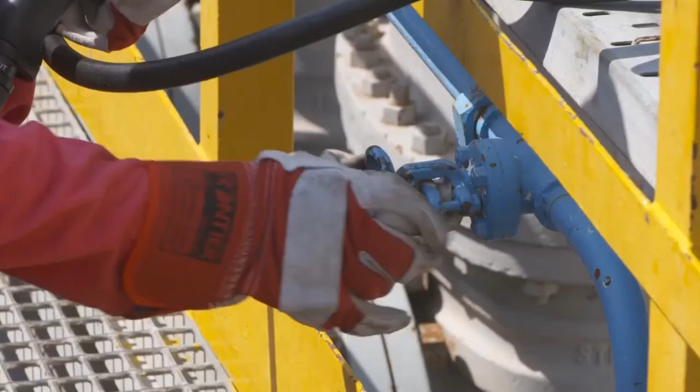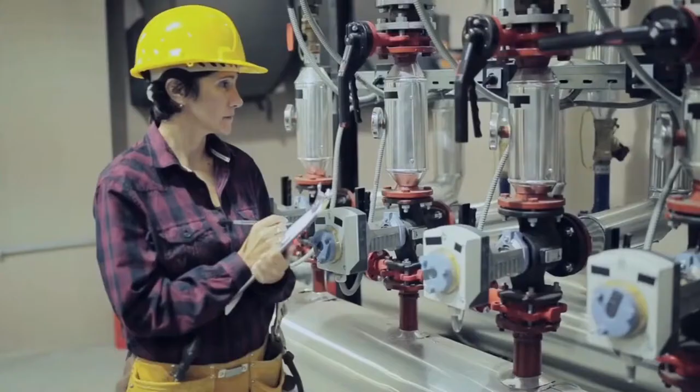Valves play a large role in most industries. Valves serve a variety of purposes in the industrial, engineering, manufacturing, and scientific communities. They are used in many parts of daily mechanical devices, including HVAC and water systems in an office, and the gasoline mechanism for an automobile.

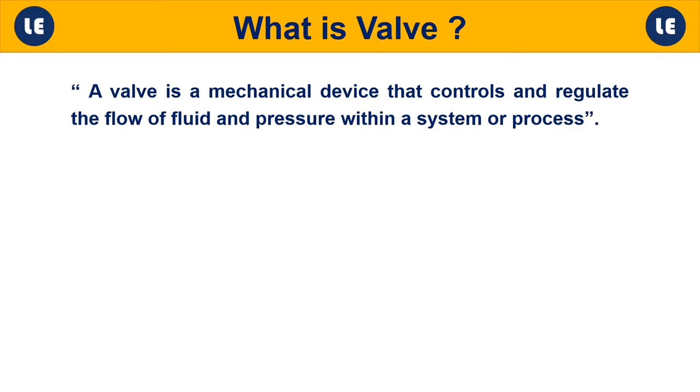Valves are one of the most important components of a piping system. Selecting the right valve can determine the success or failure of the system or process. So let us first define what a valve is. A valve is a mechanical device that controls and regulates the flow of fluid and pressure within a system or process. Like these examples given below, butterfly valve and ball valve are two important types of valve used to control, regulate, and stop fluid within a system.

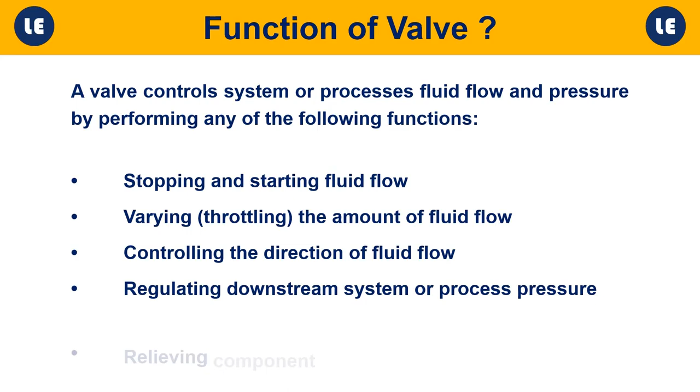Now let's move on to the function of valves in industry. A valve controls system or process fluid flow and pressure by performing any of the following functions: stopping and starting fluid flow, varying the amount of fluid flow, controlling the direction of fluid flow, regulating downstream system or process pressure, and relieving component or piping overpressure.

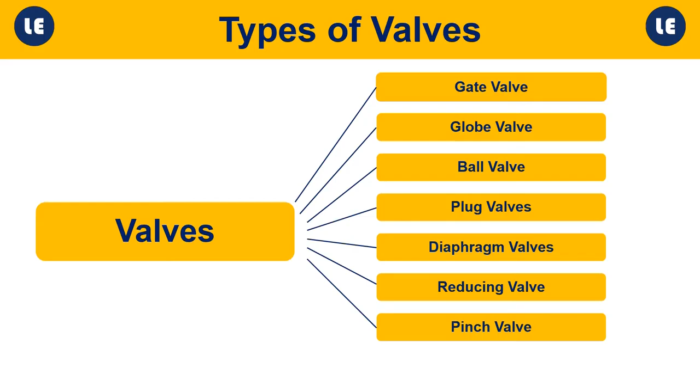There are many different types of valves used in industry depending upon the application. All types of valves are given below. We will discuss each of these types one by one in detail in a later part of the video.

Gate valve. A gate valve is a linear motion valve used to start or stop fluid flow. Gate valves do not regulate or throttle fluid flow. Gate valves are prone to vibration in the partially open state. These valves are used in the oil and gas industry, automotive, pharmaceuticals, and manufacturing plants.

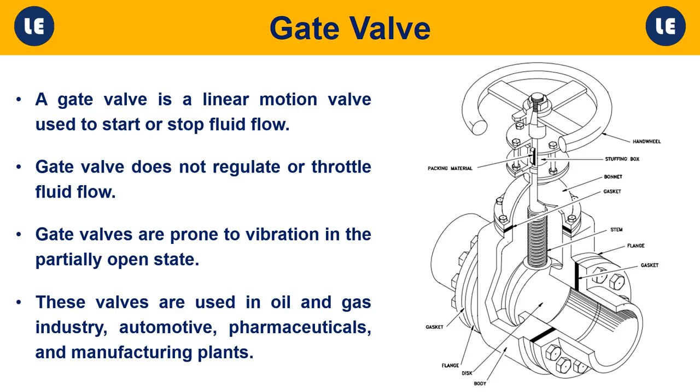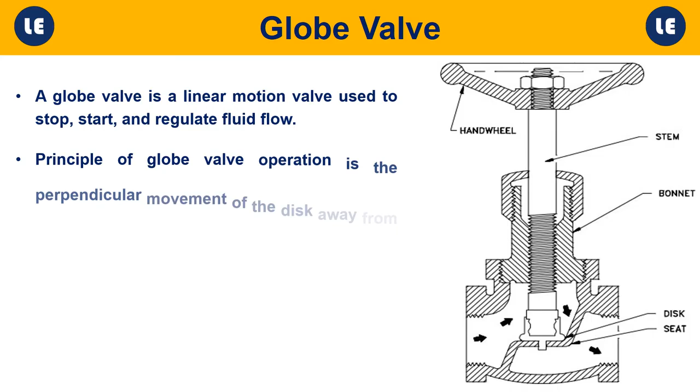Globe valve. A globe valve is a linear motion valve used to stop, start, and regulate fluid flow. The principle of globe valve operation is the perpendicular movement of the disc away from the seat. In globe valves, obstructions and discontinuities in the flow path lead to head loss. Globe valves are mostly used in water cooling systems, feed water or chemical feed systems, boilers, and main steam vents.

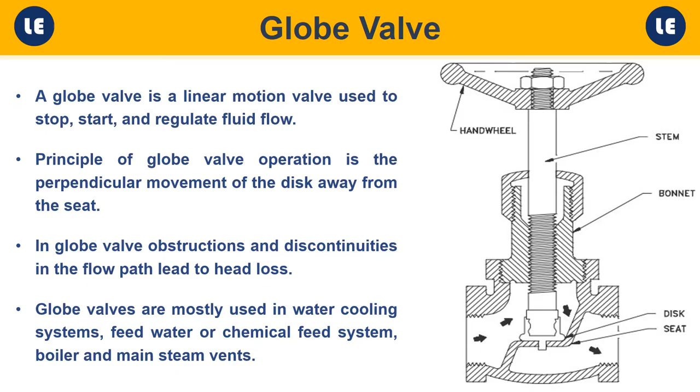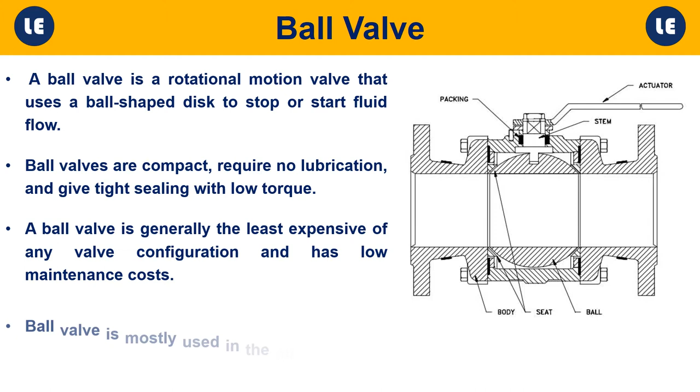Ball valve. A ball valve is a rotational motion valve that uses a ball-shaped disc to stop or start fluid flow. Ball valves are compact, require no lubrication, and give tight sealing with low torque. A ball valve is generally the least expensive of any valve configuration and has low maintenance costs. Ball valves are mostly used in the oil and natural gas industry, chemical storage, and even residential uses.

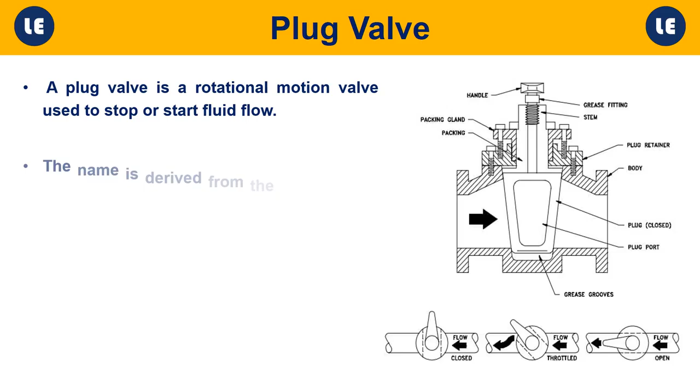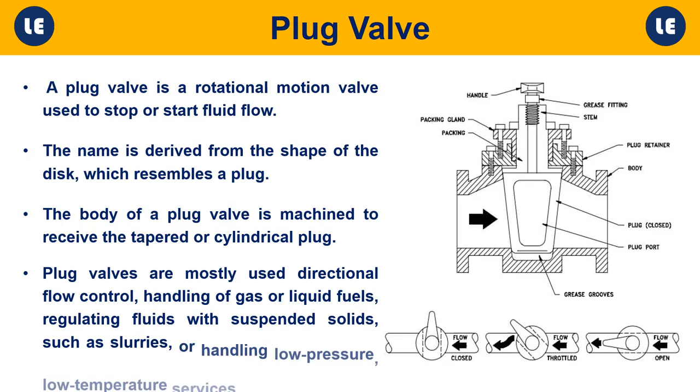Plug valve. A plug valve is a rotational motion valve used to stop or start fluid flow. The name is derived from the shape of the disc, which resembles a plug. The body of a plug valve is machined to receive the tapered or cylindrical plug. Plug valves are mostly used in directional flow control, handling of gas or liquid fuels, regulating fluids with suspended solids such as slurries, or handling low-pressure, low-temperature services.

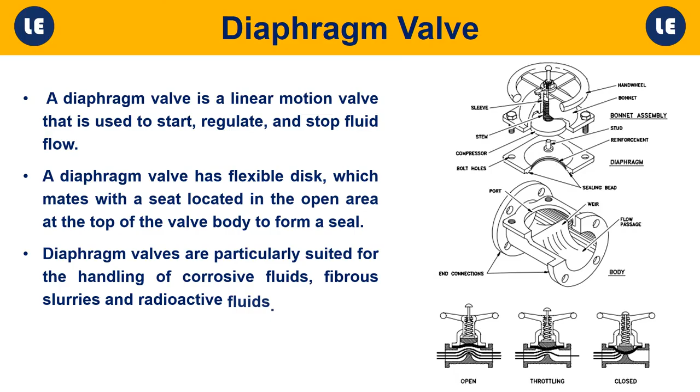Diaphragm valve. A diaphragm valve is a linear motion valve that is used to start, regulate, and stop fluid flow. A diaphragm valve has a flexible disc, which mates with a seat located in the open area at the top of the valve body to form a seal. Diaphragm valves are particularly suited for the handling of corrosive fluids, fibrous slurries, and radioactive fluids. Diaphragm valves can also be used in vacuum service.

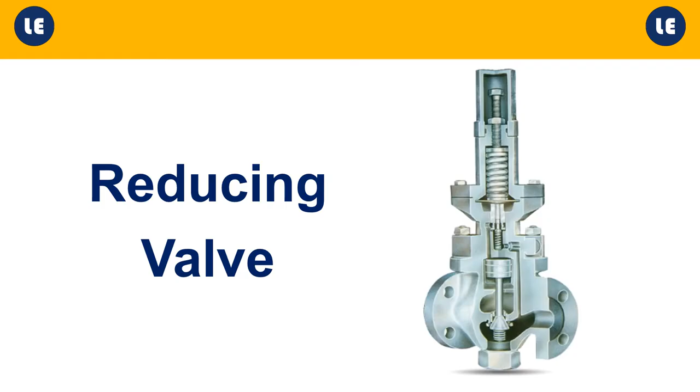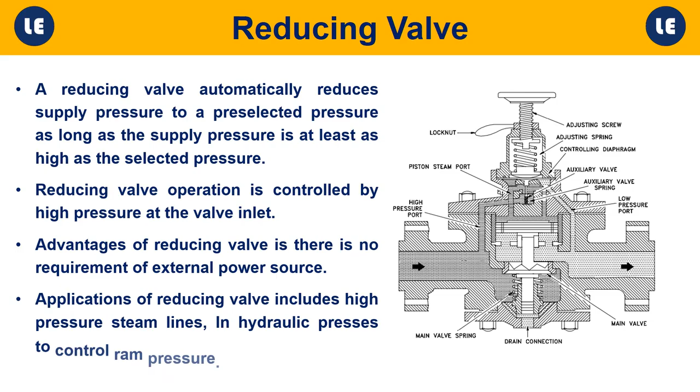Reducing valve. A reducing valve automatically reduces supply pressure to a preselected pressure, as long as the supply pressure is at least as high as the selected pressure. Reducing valve operation is controlled by high pressure at the valve inlet. An advantage of the reducing valve is there is no requirement for an external power source. Applications of the reducing valve include high-pressure steam lines, and in hydraulic presses to control ram pressure.

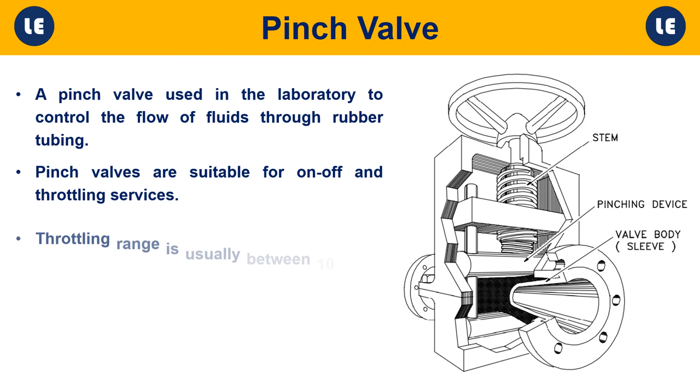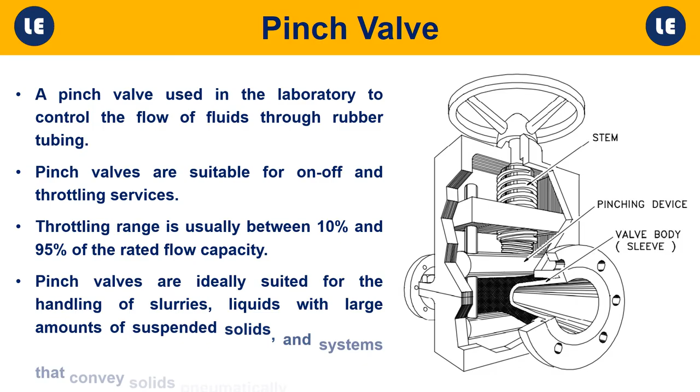Pinch valve. A pinch valve is used in the laboratory to control the flow of fluids through rubber tubing. Pinch valves are suitable for on-off and throttling services. Throttling range is usually between 10% and 95% of the rated flow capacity. Pinch valves are ideally suited for the handling of slurries, liquids with large amounts of suspended solids, and systems that convey solids pneumatically.

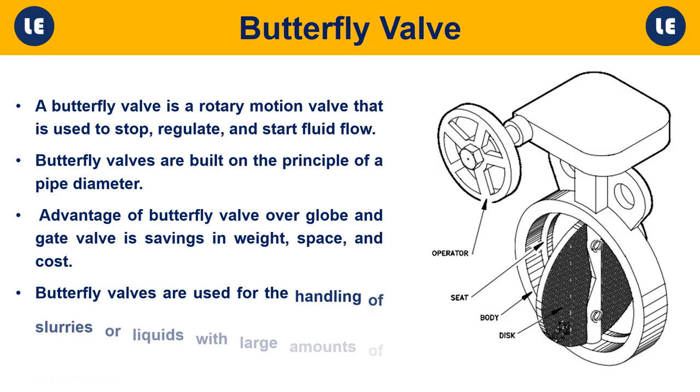Butterfly valve. A butterfly valve is a rotary motion valve that is used to stop, regulate, and start fluid flow. Butterfly valves are built on the principle of a pipe diameter. The advantage of a butterfly valve over globe and gate valves is savings in weight, space, and cost. Butterfly valves are used for handling slurries or liquids with large amounts of suspended solids.

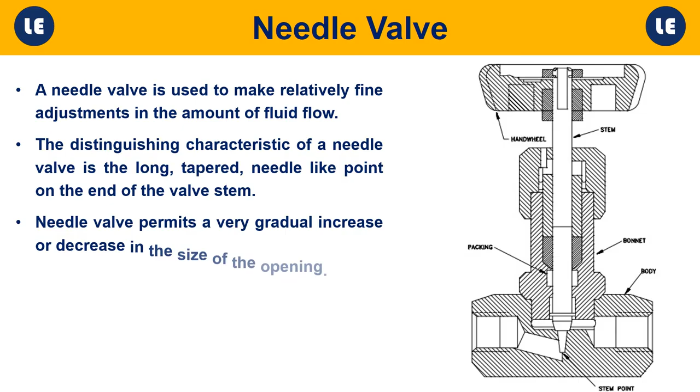Needle valve. A needle valve is used to make relatively fine adjustments in the amount of fluid flow. The distinguishing characteristic of a needle valve is the long, tapered, needle-like point on the end of the valve stem. A needle valve permits a very gradual increase or decrease in the size of the opening. Needle valves are used in constant pressure pump governors, automatic combustion control systems, and as a reducing valve.

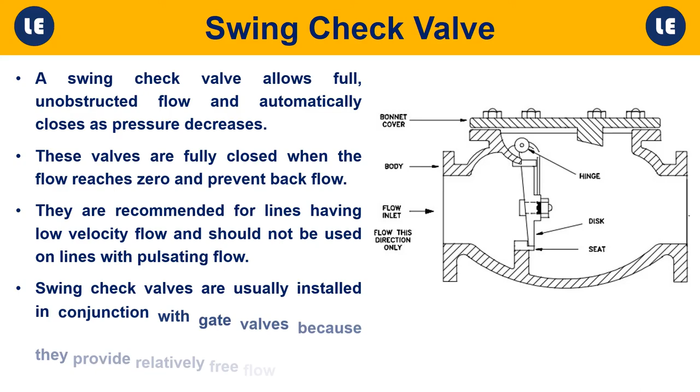Swing check valve. A swing check valve allows full, unobstructed flow and automatically closes as pressure decreases. These valves are fully closed when the flow reaches zero and prevent backflow. They are recommended for lines having low velocity flow and should not be used on lines with pulsating flow. Swing check valves are usually installed in conjunction with gate valves because they provide relatively free flow.

Lift check valve. A lift check valve is used in piping systems in which globe valves are being used as a flow control valve. They have similar seating arrangements as globe valves. Lift check valves are suitable for installation in horizontal or vertical lines with upward flow. They are recommended for use with steam, air, gas, water, and on vapor lines with high flow velocities.